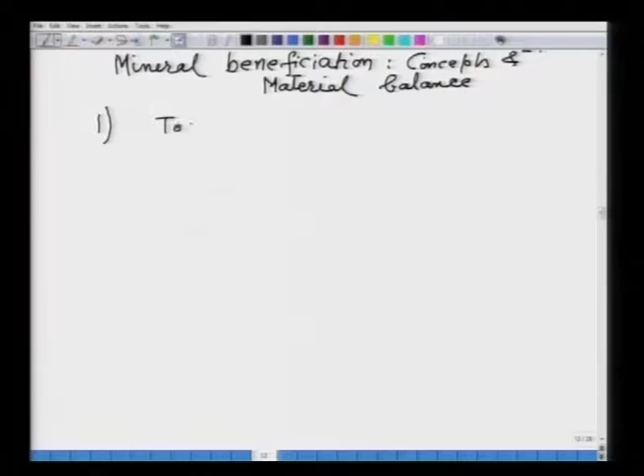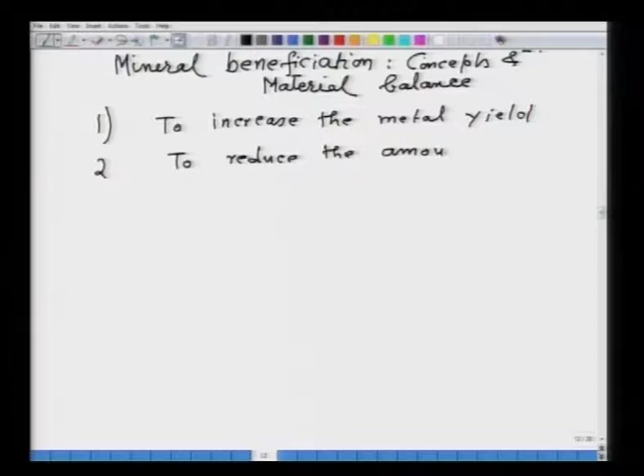Why? Because of two benefits. If you increase the metal grade of the ore, first, to increase the metal yield, and the associated second advantage is to reduce the amount of gangue.

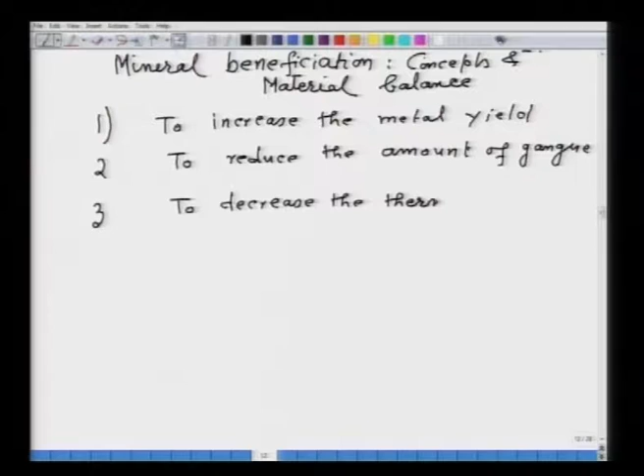Third advantage by increasing the metal grade of the ore is to decrease the thermal energy requirement, in order to separate metal from gangue in pyrometallurgical technique, because pyro means temperature, so the separation of metal from gangue occurs at high temperature.

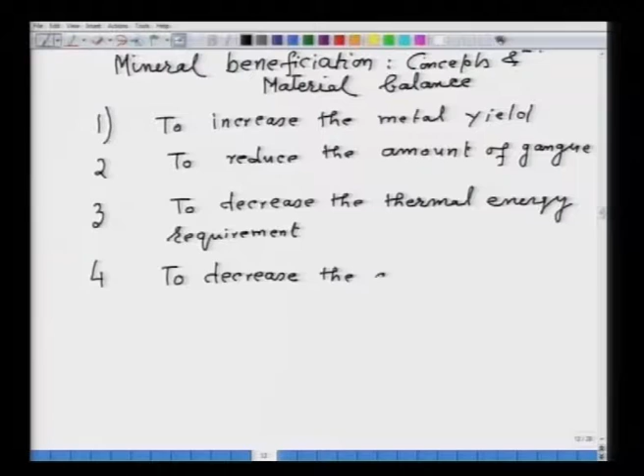So the third benefit is to decrease the thermal energy requirement, and the fourth benefit is that another route of metal extraction, hydrometallurgy, requires a large amount of aqueous solution. So by increasing the metal grade of the ore, you will be able to decrease the aqueous solution requirement in the hydromet route. So these are some of the benefits of increasing the metal grade of the ore.

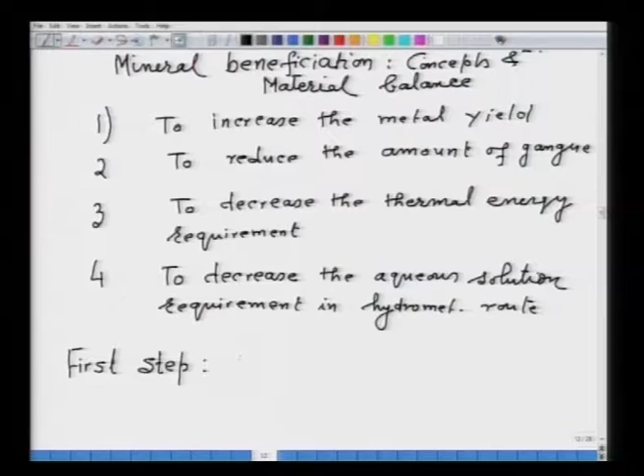Now the question comes, how to increase the metal grade of the ore? So the first step, whether it is pyrometallurgical extraction or hydrometallurgical extraction, is called mineral beneficiation. The objective of this step is to increase the metal grade of the ore. That we are very clear - we have to increase the metal grade of the ore.

Now this mineral processing technique requires two things. One is the liberation of the mineral, and second is the concentration of the mineral. So two steps are required in mineral processing: one is called liberation of mineral.

By liberation of mineral, I mean if you take an ore from the natural reserve and try to observe it under the microscope, you will find the valuable mineral is distributed within the grain, across the grain, in a very, very small amount. So if you want to increase the metal grade of the ore, you have to liberate the mineral from that matrix of gangue. How can you do that? How can you liberate the mineral?

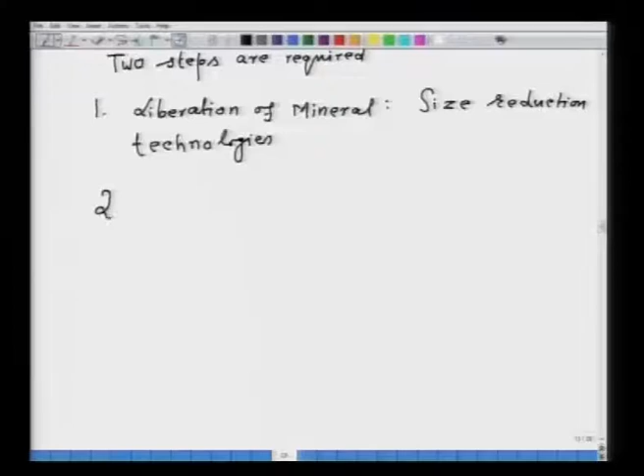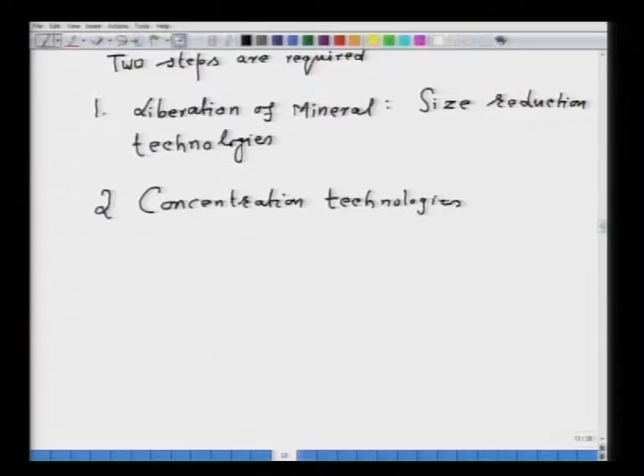What are we talking of? To create a state from the lumpy ore in hand to a state where we can obtain separation of valuable mineral. We are talking of purely physical separation, and that can only be achieved once you reduce the size of that particular lump of ore, so that the valuable mineral is set free, and later on, the so-called concentration technologies can be used to separate valuable mineral from the ore matrix.

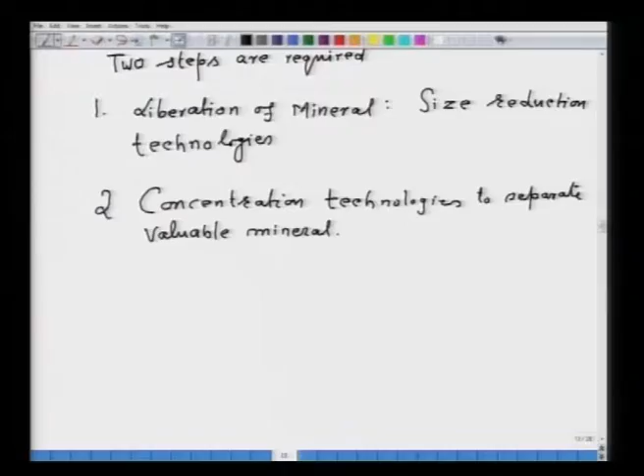So what will I do now? I will take both these steps in brief, because the objective of the course is not to go into detail of these processes. Towards the end, I will give you references where you can read further if interested in detail. Here I am going to give you those details required to develop the material balance in case of mineral processing, because that is the objective of the course - so that while applying the concept of liberation or concentration technologies to solve problems on material balance, that is the objective. So I am going to give you the brief details of both these technologies.

So let me take first of all the liberation.

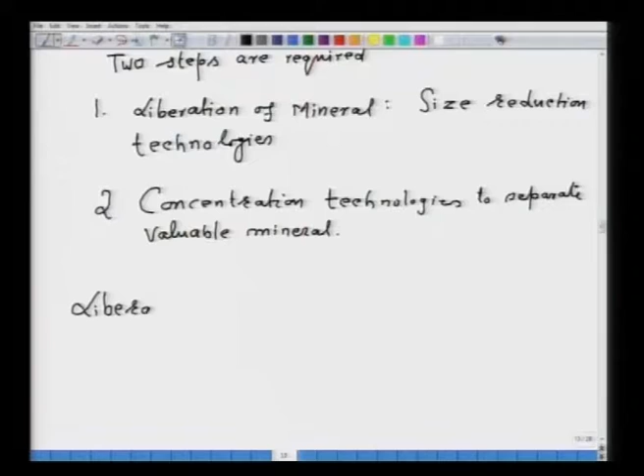We are talking of liberation of valuable mineral. That is what our objective is. Now, this is achieved. One, crushing is the first stage.

What you do? You take the lump ore from the natural reserves. Because of its huge size, it is being crushed to some intermediate size. So, the first step is crushing, and crushing is followed by screening, so that you can remove the oversize

from the undersize. Undersize means the product which is acceptable for further size reduction technologies. So, crushing is followed by screening, and in the screening you have oversize and you have undersize.

One which is passing through a screen, you call it undersize, and one which retains on the screen, you call it oversize. The oversize can be sent back into the crusher, whereas the undersize is sent back to further size reduction operation.

Now, you may argue, sir, while in the crushing we may have attained the mineral in its fully liberated state. No, it is not possible because of the size. So, then it is ground further. So, the next stage in case of liberation is called grinding.

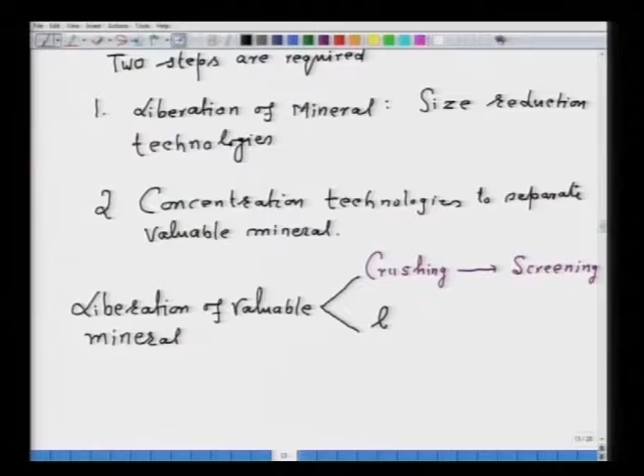Or sometimes this is also called milling operation, and in the milling operation, the feed for milling operation is the undersize from crushing operation. From crushing, that is the feed for the so called milling.

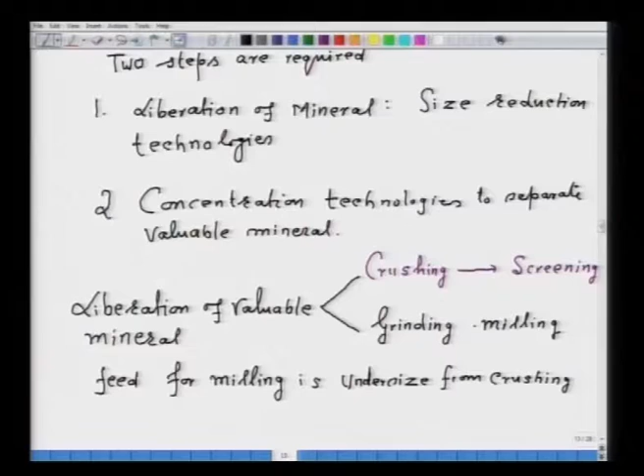Now, let us see how the milling is attained. Milling in fact is a size reduction technology where the feed is ground to a state of full liberation of particles. So, this milling is in fact what is being done.

The feed is taken into a cylindrical type of vessel which rotates at a particular speed, and the size reduction of the feed occurs by the medium. So, in fact, in milling, in short, force for size reduction is applied through a medium.

Now, medium could be balls of different sizes, they are spherical balls of different sizes, then there could be rods. So, these are the medium, they are used to grind the feed from the crusher so as to get the valuable mineral for further concentrating operation. So, according to the vessel which is being used for milling purpose, the milling is named according to this.

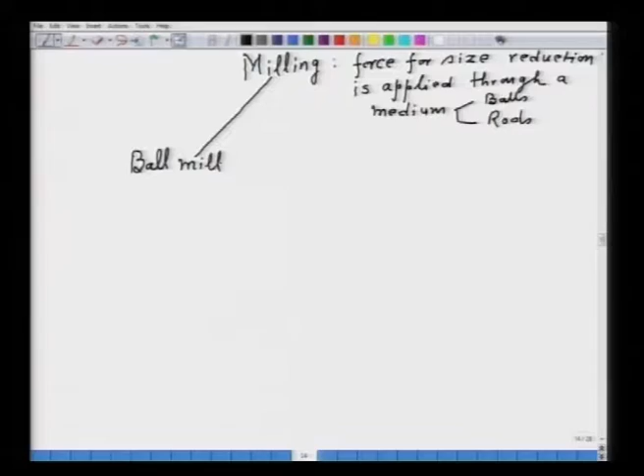So, one is called ball mill. In the ball mill, the feed is rotated in a cylindrical vessel at a particular speed, and the medium of grinding are spherical balls. That is why this is called a ball mill.

Now, here speed of the mill is important. You cannot run the vessel too high a speed or too low a speed, the details you see in any book. So, one is the ball mill, because spherical balls are used as a medium for grinding.

Another is called rod mill. In the rod mill, instead of spherical balls, straight rods are being used to mill the feed.

Now, since the objective of milling is to get the valuable mineral in its liberated state, one has to go to a very fine size. I mean that fine size where you are sure that the mineral is completely liberated from the matrix of the ore, because in the ore valuable mineral and gangue are intimately mixed. So, you have to separate it by reducing its size. That is the objective of this ball milling or rod milling.

So, because too much amount of fines is produced, and because of, what should I say, a lot of pollution and so on, milling, particularly ball milling, is done under wet condition.

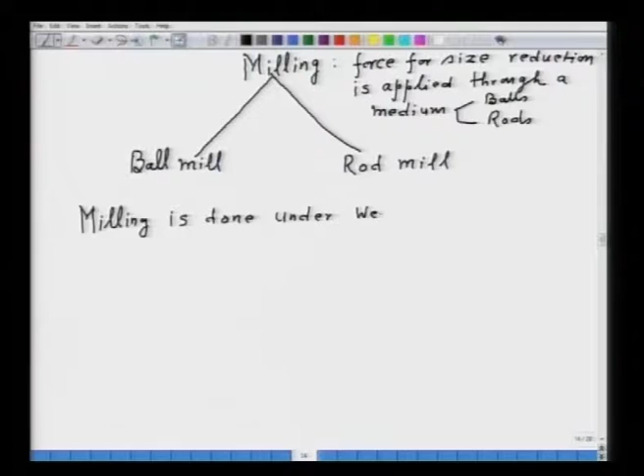However, it depends upon the size up to which you want to grind the product, but mostly milling is done under wet condition. The objective is to reduce the amount of pollution. This is also called wet milling. One is dry milling, another is wet milling. In the dry milling, no water is used. In the wet milling, water is used.

So, for wet milling, material balance is important. Why is it important? First of all, to know what is the amount of water in a milling circuit.

I will tell you what is a circuit. In a milling circuit, and second is percent solid in slurry, percent solids in slurry. A slurry is a mixture of solid and water, as I have discussed when I was lecturing on stoichiometry. Now, both this information, why do you want it?

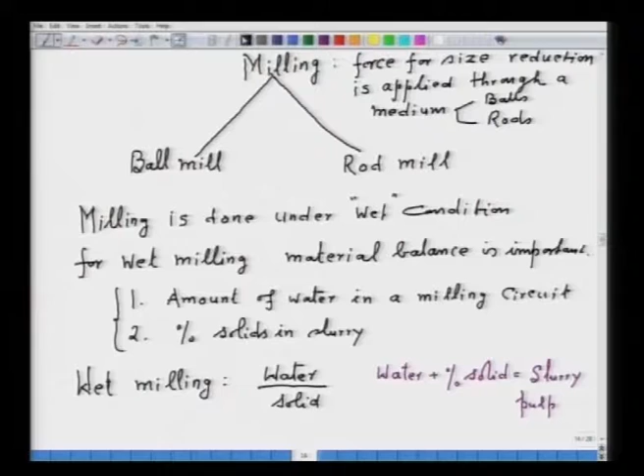Here what is important is that the viscosity of slurry is important. Why is it important? For that you have to think what determines viscosity. Viscosity determines the flowability of the mixture that you have formed. In the grinding operation, since the mill is rotating at a particular speed, the slurry should also easily move into the vessel. For that viscosity is important, and for that percent solid in the slurry is an important issue.

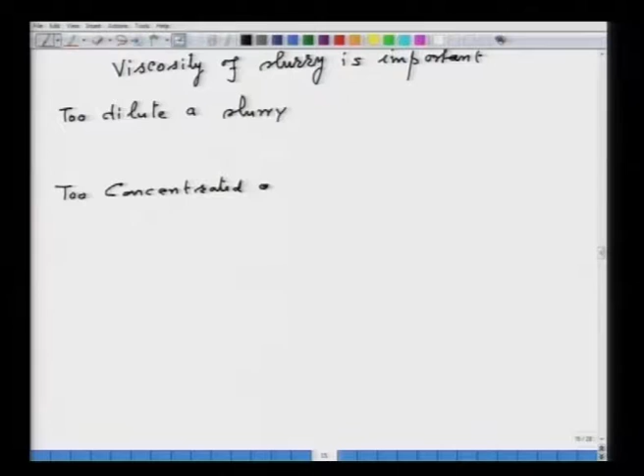Now two things can occur: too dilute a slurry, or too concentrated a slurry. If you have too dilute a slurry, the percent solid is very less, the amount of solid is less, even though you put the medium according to your calculation. Because solid is less, the medium will interact with each other. So too dilute a slurry will cause wear of the medium, which is very important.

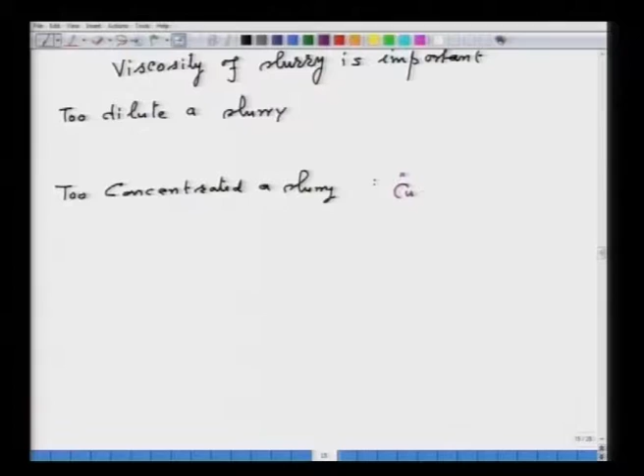If you have too concentrated a slurry, that means your percentage of solid is very high. You thought, well, let me mix more percent solid, without knowing what is the percent solid in your slurry, and you have made too concentrated a slurry. What will it do? The slurry has to move, but its viscosity has become very high, so it will be very difficult to move. In that case, too concentrated slurry will cause a so-called cushioning effect, whereas too diluted slurry will lead to wear of the medium, which is spherical balls in case of ball mill.

So these are the hazards of not having an optimum percent solid in the slurry, and for that it is important to calculate the percentage of solid in a slurry in order to arrive at an optimum composition of the slurry, or the optimum density of the slurry.

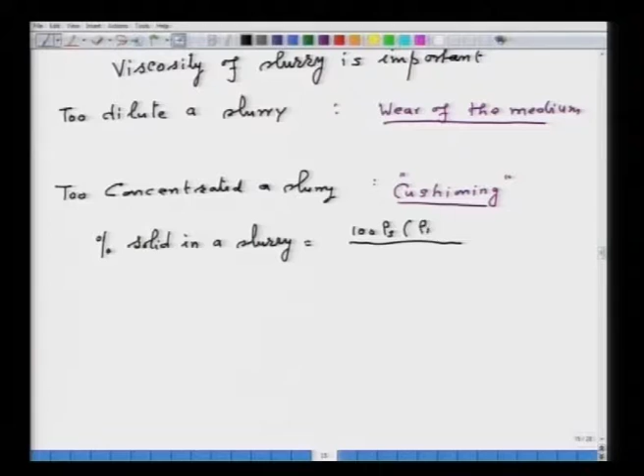Now, as you recall from my stoichiometry lecture, I gave you the formula. I will write it again: percent solid in a slurry equals 100 times rho s into rho m minus 1000, divided by rho m into rho s minus 1000. This is all density, where rho s is the density of solid, rho m is the density of slurry, and 1000 is coming because you have mixed solid in water, and water has a density of 1000 kilogram per meter cube.

So just as an illustration, if I take for example a solid which has density rho s equal to 3000 kilogram per meter cube—we have to substitute the value all in kilogram per meter cube, because I used the density of water in kilogram per meter cube—and let us take the density of slurry as 1500 kilogram per meter cube.

Then I can find out by putting both these values into the formula for percent solids. I can know now the percent solids in a slurry, that will be equal to, you can just calculate it, 50%. You can substitute those values, it is very simple, just substitute the values and you will get the answer.

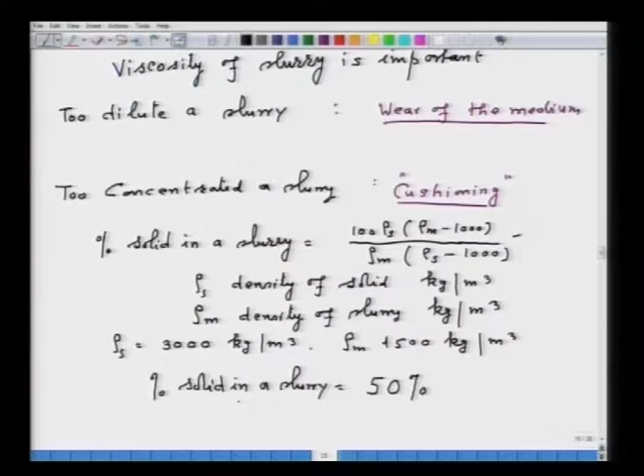Now, what will I do with the percent solid? I can use the percent solid to find out the mass flow rate of the slurry. So, ultimately mass flow rate of the slurry, that will be volumetric flow rate of the slurry into density of the slurry into percent solid, divided by

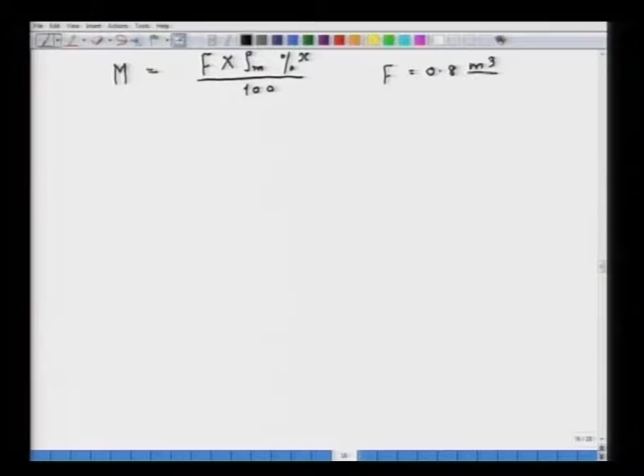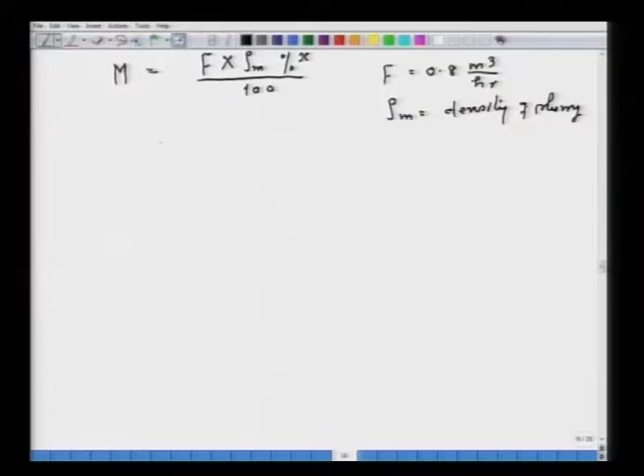100. And now, if I take F, which is the volumetric flow rate of the slurry, as 0.8 meter cube per hour, and rho m is the density of slurry, so if I substitute, I get m equal to 600 kg per hour, that is the mass flow rate of solid in the slurry. So these are the important calculations that can be performed while performing a material balance.

Now, as I have said, these flow in a circuit. Now, what is a circuit? Suppose if I want to make a milling circuit, let me make a milling circuit.

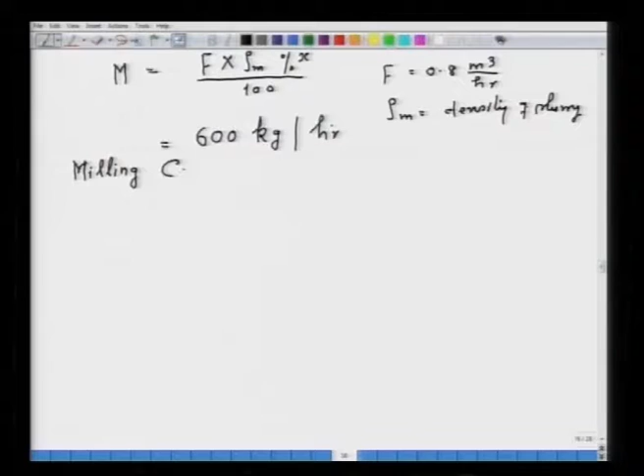Very often in the milling circuit, the feed is fed into the rod mill, then it goes for the separation, then you have undersize, oversize, connected with the ball mill. So a milling circuit, if it comprises of rod mill, hydrocyclone, and ball mill.

This will look like, for example, if I take a feed, and the feed enters into the rod mill. Here I add a little amount of water in order to make a slurry, grinding occurs, then the feed flows into the hydrocyclone.

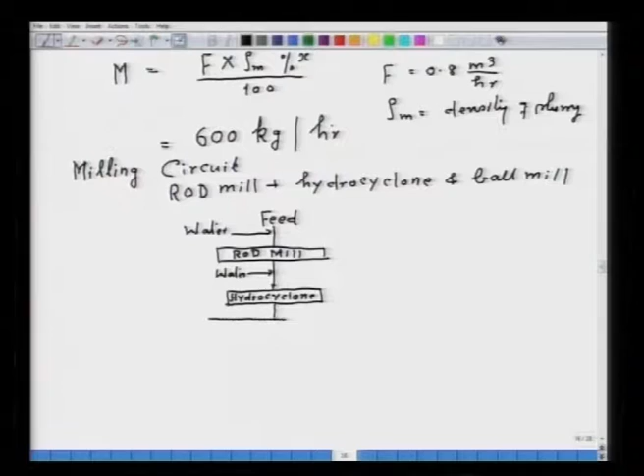Here I may add also water if it is required. So this hydrocyclone divides the feed into two products. One is the undersize and another is the oversize. Now normally in the hydrocyclone, the oversize, it is a useful product, and this oversize is sent for

concentration operations. This means that in the oversize we have attained the mineral in the liberated state, and that can go for further concentrating operation, whereas the undersize has a size bigger than required. So what is done? This undersize is fed into a ball mill,

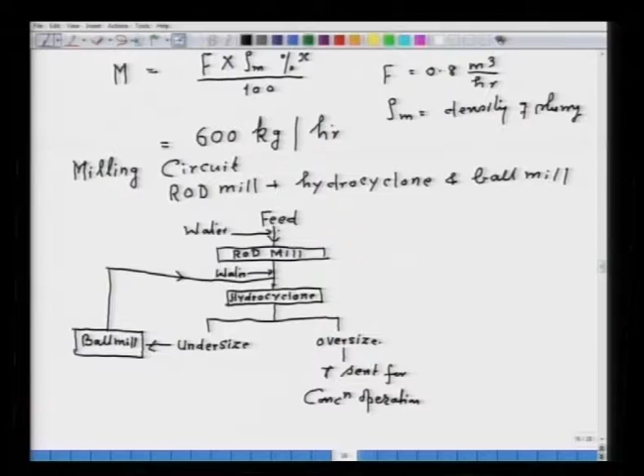and the product of the ball mill, it can go further to the hydrocyclone. That is the direction. So this entire thing is called a circuit of milling. You are required to analyze this circuit, that means you are required to know what is the amount of water that is flowing, what is the amount of solid that is flowing, and so on.

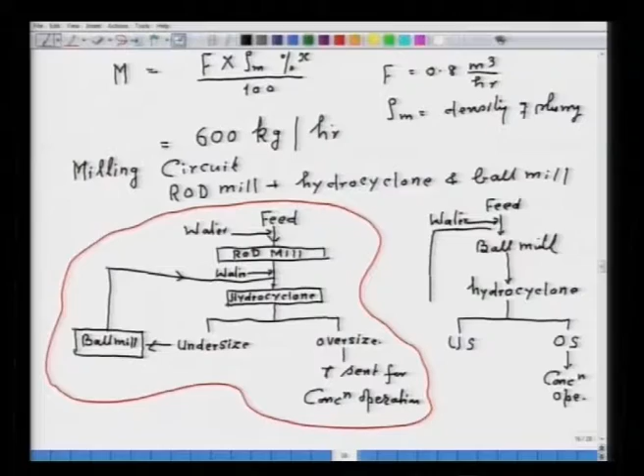Or another circuit which consists of only ball mill: you have the feed, one can directly go into the ball mill. Here water is added, then it goes to hydrocyclone, and as such the hydrocyclone, you have undersize and you have oversize. So oversize is for concentration operation, and undersize can further go for further milling operation. This is called the so-called circuit or milling circuit.

Now, in this connection I have to say something more. For example, in case of wet milling, you may ask why wet milling is done; there are advantages of wet milling. One advantage is less power requirement. Then reduced pollution, because now the fines will not be flying out of the vessel because of water.

So now this analysis of the circuit is important, and that we will do in the material balance.

Now, for further reading, if you want to go further, I give you a few references, so first you can go through the book of A. Taggart, they are the reference you should consult: Taggart, Elements of Ore Dressing, Wiley, New York, 1951. Or you can also do another, which is Newton, Extractive Metallurgy, John Wiley, New York, 1959. However, there are several books on ore dressing; you can consult any book for updating these particular things or for knowing more about the technological details of the milling operation.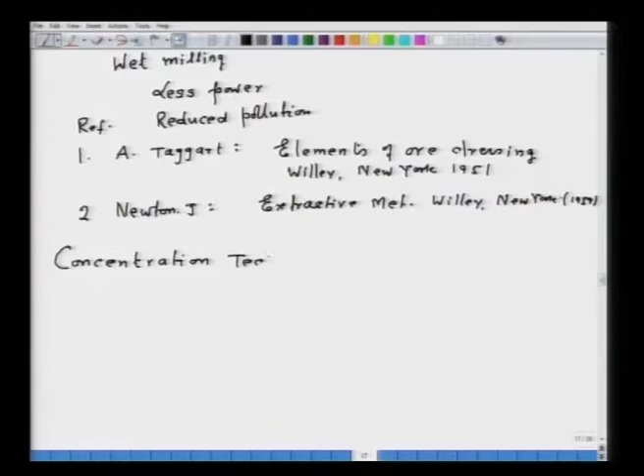Now, as the objective is very clear, what do we want here? We want to separate the valuable mineral from the gangue mineral, that is our objective.

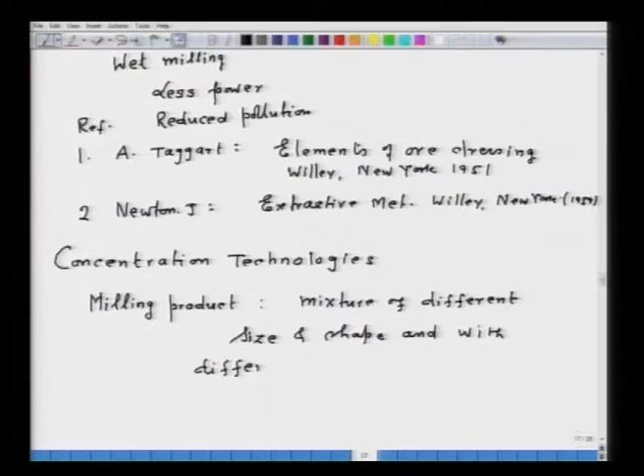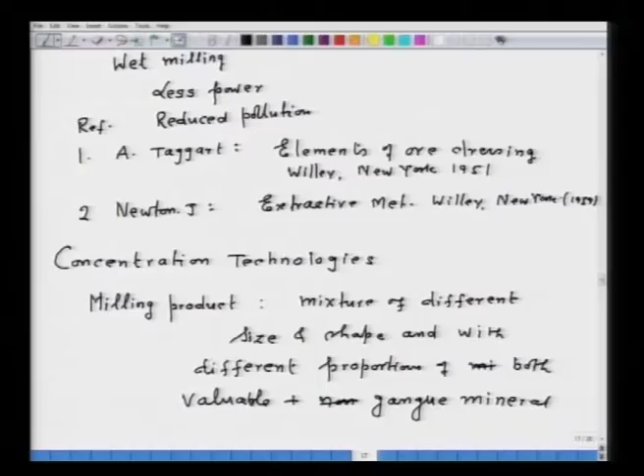So what do we have? We have now a milling product, we have the oversize of the milling product. What is this milling product? It is a mixture of different size, shape, and with different proportions of minerals, of both valuable plus non-valuable mineral, or let us call it gangue mineral. Now we have gotten this mixture, a mixture of different size or different shape. That means there are particles with different size, different shape, and different proportion of both valuable and gangue mineral.

With this I mean, suppose I have a feed for the concentrating operation. I will denote this as the so-called gangue mineral, and this as the valuable mineral. So this is the valuable mineral and this is the gangue mineral. The feed will consist of something in between these two minerals. That means you may have a feed which may consist of fully liberated mineral, or you may have it partially liberated. So this portion is gangue, this portion is mineral.

So what I wanted to say is that the feed which you have gotten from the milling operation contains particles with different sizes, different shapes, and different proportions of mineral. Now, it is very important to know that in liberation technologies, you are producing particles containing minerals. That means there are particles which are fully mineral, and there are particles with different proportions of mineral.

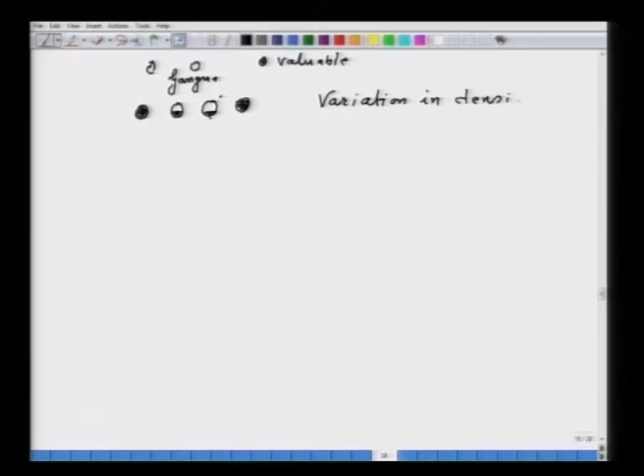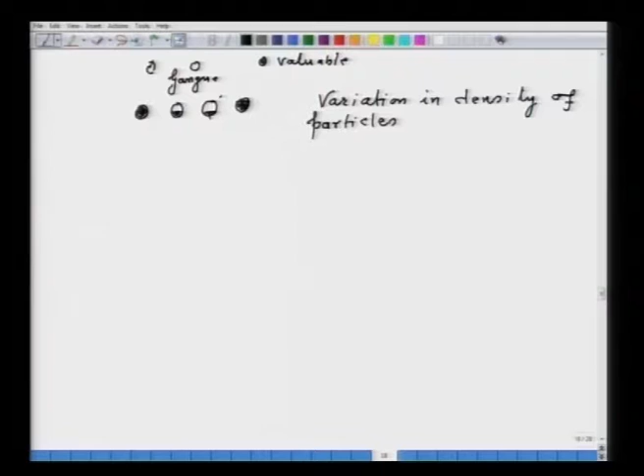So what I mean to say is that you have to develop concentration technologies to handle these particles containing mineral. Here you should also note that in this mixture we have variation in density of particles. What does this mean? It is clear that the density of a pure mineral particle is definitely greater than the density of a gangue mineral particle. Now, particles with different proportions of mineral will have different densities in between these two. So that is the key point for developing concentration technologies.

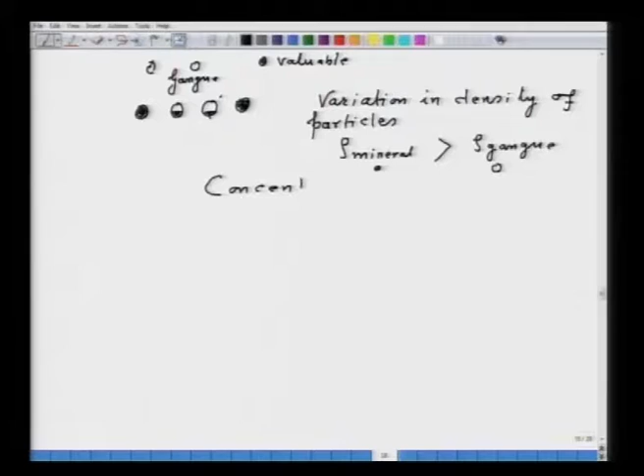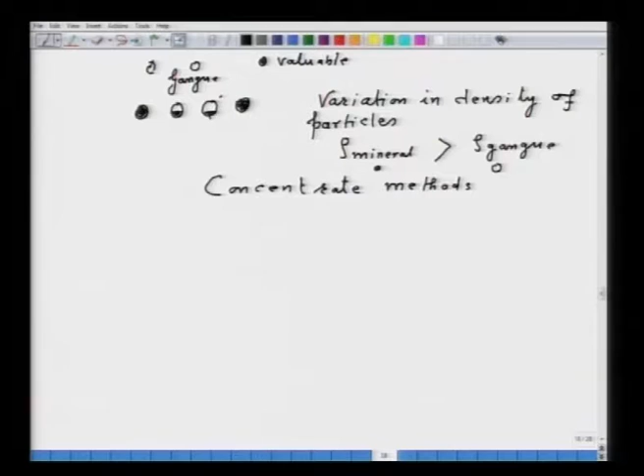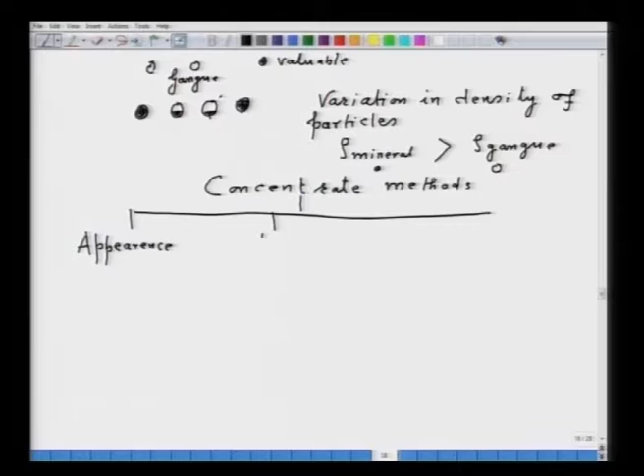So now what do we have to do? We have to separate the valuable mineral from the gangue mineral. The concentration methods, essentially most of them, are based on density. So I will list down all the methods. The first method is based on appearance - if you know the appearance of the mineral, particles can be physically sorted out. Another is based on density, where most separation is done based on density, because the density of the mineral is larger compared to the density of the gangue, and for particles in between, one can select the density of the medium so that separation could be achieved. Another very popular method is surface modification.

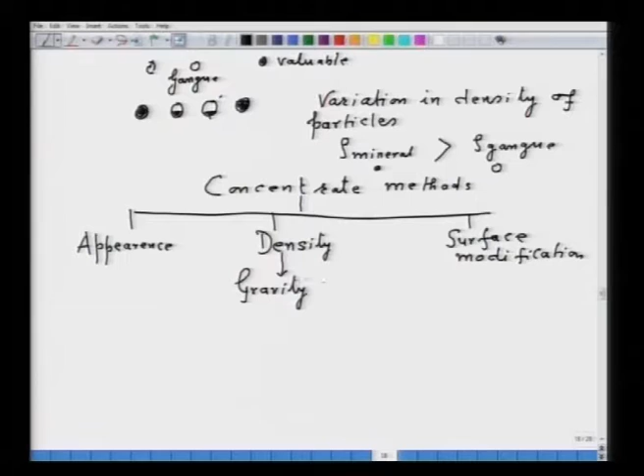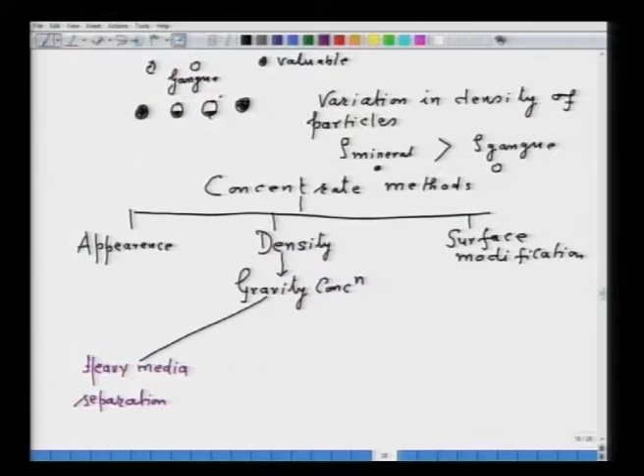Just to give you a little idea of the various methods: density-based methods are called gravity concentration methods. In gravity concentration method, we have one called heavy media separation - that is, you select a medium of some density so that the particle containing minerals can be floated or sunk depending on the density of the medium.

Another method is called classifier, where air can be used as a medium or water can be used as a medium, and the velocity of fall of particle is used for separation, which is different in air and different in water. Accordingly you have pneumatic classifier or hydro classifier. In hydro classifier you use water as a medium, in pneumatic classifier air is used as a medium, and the difference in density is the key concept for achieving separation of the mineral.

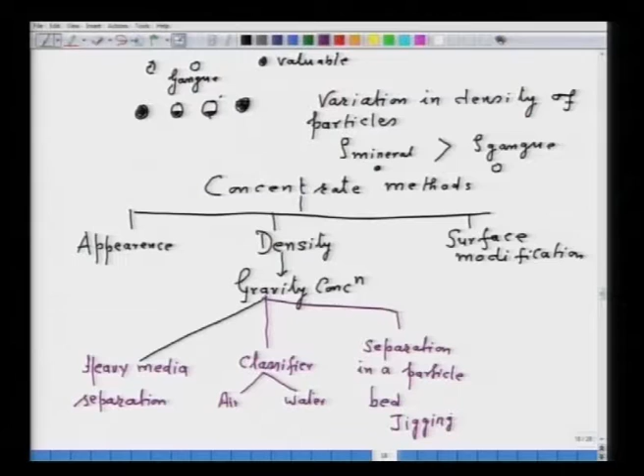The third technology is separation in a particle bed, and the most important technology here is jigging. The last one is thin film flowing, which is called tabling.

Now, surface modification means you modify the surface of the mineral. You are not chemically affecting the mineral, you are modifying its surface so that it becomes hydrophobic or hydrophilic. This method is called flotation.

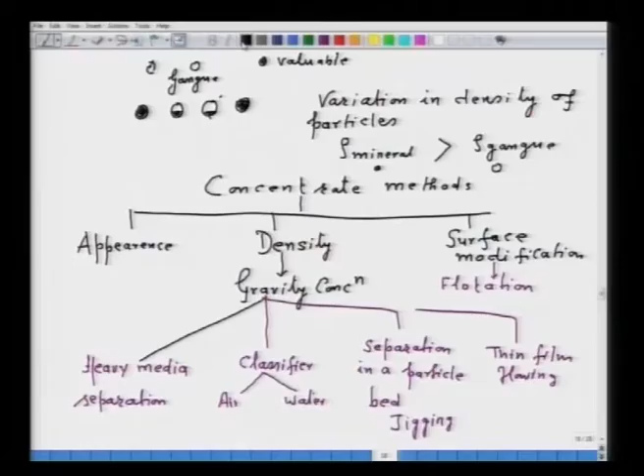This method is called flotation. The principle is the density difference between the particle containing minerals and the medium which is being used. The objective of all these concentrating technologies is to separate the feed.

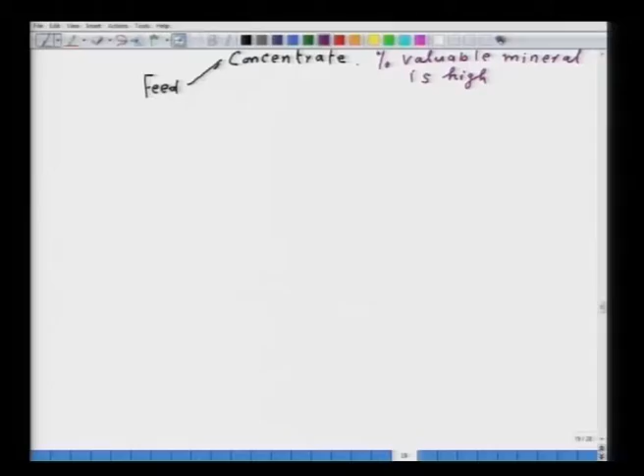You separate the feed into three products. One is the concentrate, and in the concentrate the percent valuable mineral is supposed to be high. That is why you call it concentrate, and this concentrate goes to the plant for extraction of the metal. This concentrate is of high grade and it can be used for further processing to get the metal.

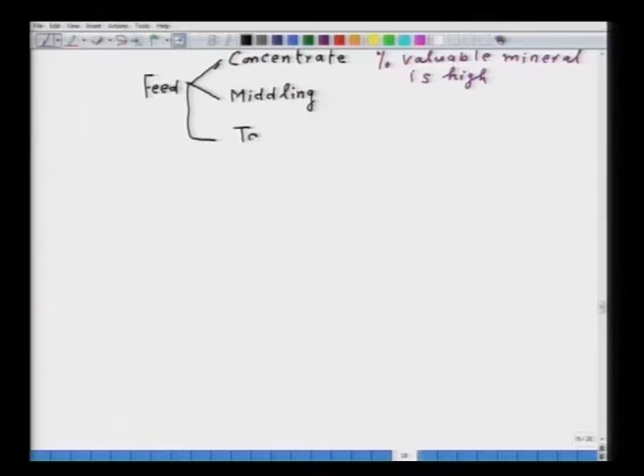Another product from the feed is called middling, and the third product is tailing. Tailing is purely waste; it contains most of the gangue minerals. Middling may contain both concentrate and tailing. So what is done is the middling is further treated, so that some portion goes to concentrate and another portion goes to tailing.

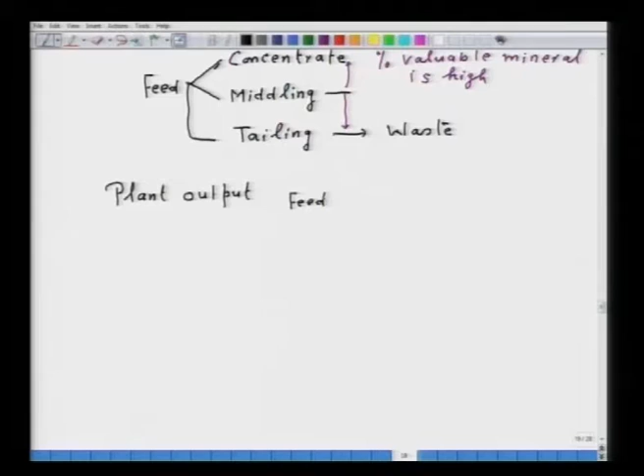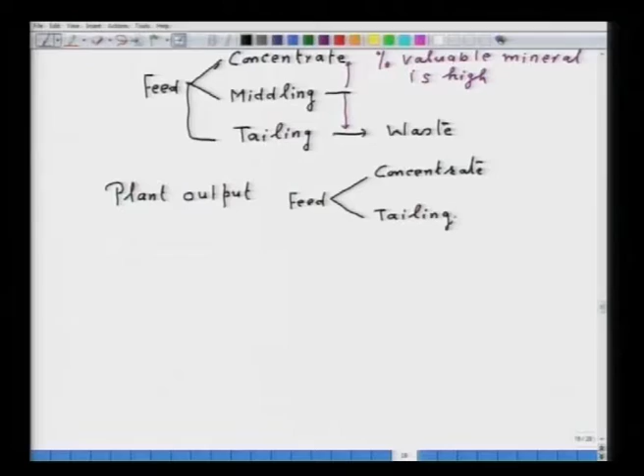So normally the output of a plant consists of feed being separated into concentrate and tailing. This is the output of a plant: feed is separated either as concentrate or as tailing.

This concentrate is dried, or kept in wet condition, and sent for metal extraction, while tailing is waste and it is dumped or sent for waste treatment, or whatever you want to do with it.

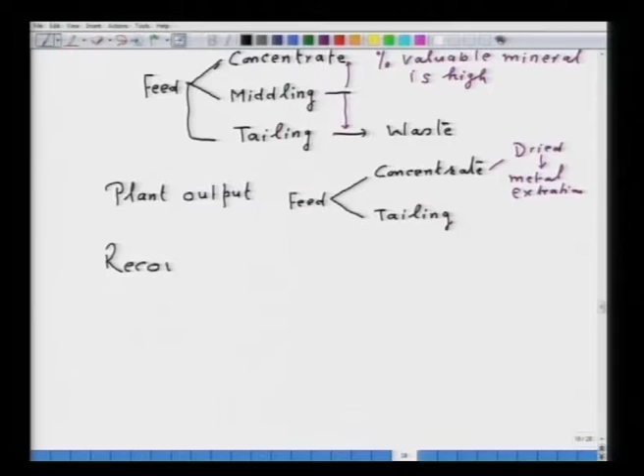Now, one of the most important things you should know is recovery and grade. Recovery of particles containing valuable minerals, or recovery of a valuable mineral, can be 100%, but the metal grade will not be 100%; it will belong to the metal grade of a pure mineral. Let me illustrate by an example.

If I take an example where I take a feed of say 1000 kg, and in that 1000 kg I have 500 kg chalcopyrite, 200 kg Fe2O3, plus 200 kg let us take SiO2, and 100 kg let us take Al2O3.

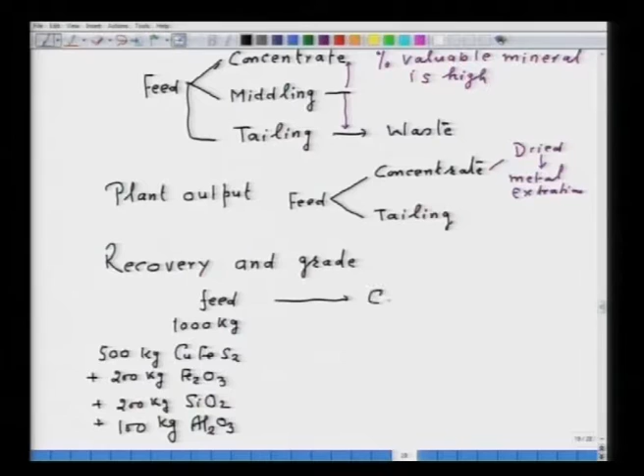Now I have got the feed, say concentrate. I produce a concentrate now, which also has 1000 kg, in which 500 kg CuFeS2, plus 200 kg Fe2O3, plus 200 kg SiO2, plus 100 kg Al2O3.

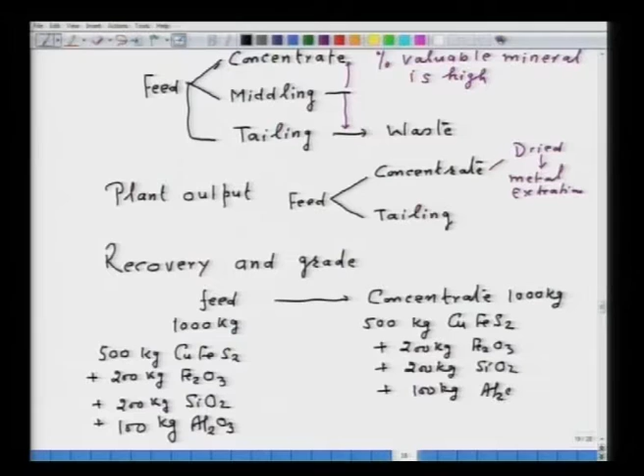What have I done? I have done nothing. I have taken a feed and said it is a concentrate and claimed I have recovered 100%. No doubt the valuable mineral in the feed was chalcopyrite, CuFeS2, so you have recovered all the valuable mineral in the concentrate. But now what is the grade of this concentrate? The grade of the concentrate is very, very low, because the gangue minerals are as they were in the feed.

If the feed has X as the metal grade, then the concentrate also has X as the metal grade, because you have not removed the gangue minerals at all. So therefore, recovery and grade are both important.

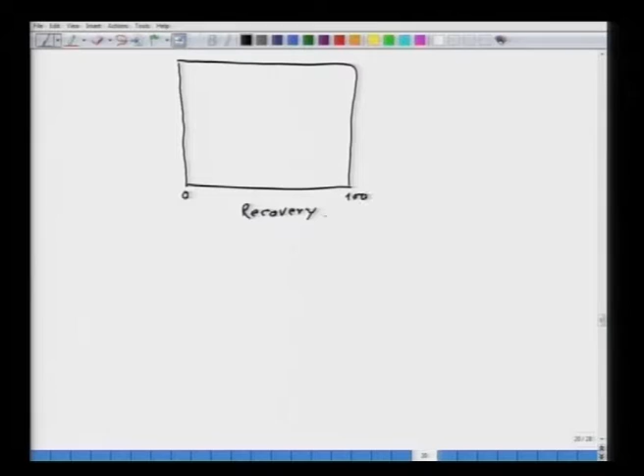Now if you want to see how they vary, the variation goes something like this. Say if I take recovery here, which could be for example 0 to 100 in percent, and I take grade here. For 0% recovery, this is the value of the grade, and this value corresponds to the grade of a pure mineral.

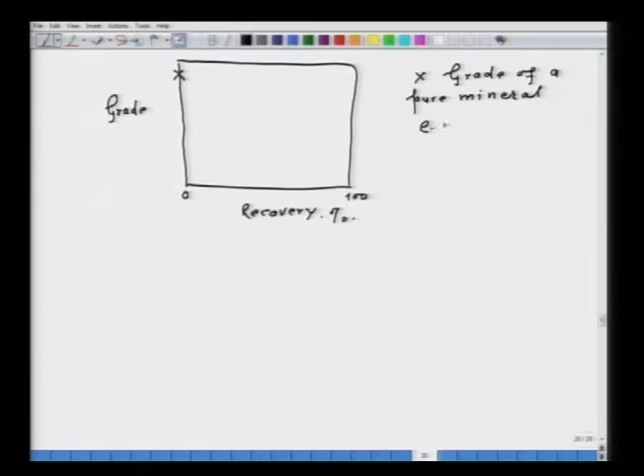Grade of a pure mineral, for example, copper grade in CuFeS2 is 34.7%. So that point is this.

Now you can't go beyond this. The metal grade cannot be more than 34.7%. So you see, the metal grade can never reach a value of 100; it will depend upon the composition of the compound and their stoichiometric values. So remember, grade can never be 100.

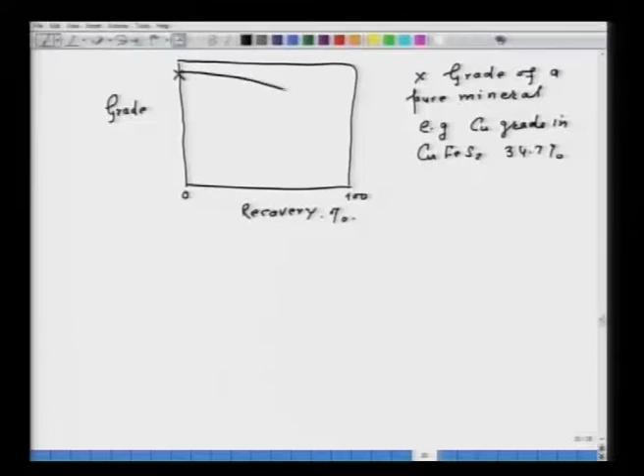So here, if I increase the recovery, what will happen? The grade will decrease, and ultimately at 100% recovery, this will be my grade. So that is how the relation between grade and recovery works. A recovery of 100% means I do nothing, that is, I divert the entire feed to the concentrate, but then the grade is very important because we want to produce metal from the concentrate.

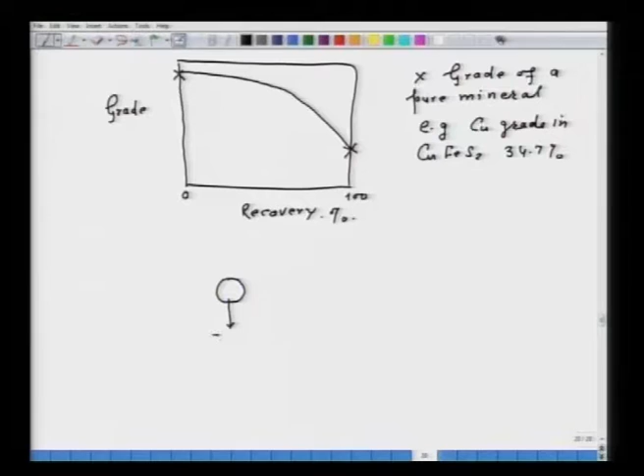Number two important thing is that for all gravity concentration operations, it is the velocity of the particle that is very, very important. If I consider a particle which is falling, it experiences three forces: this is due to weight, Fw, and this is a sort of buoyancy force.

See, buoyancy force, and this is a so called drag force. This you must have experienced if you take a particle and dip in water, because of its weight it sinks, and if the upward forces equalize the downward forces, then it is stable, otherwise it will move. So, if you do the force balance, then we say that Fb plus Fd, that is equal to Fw.

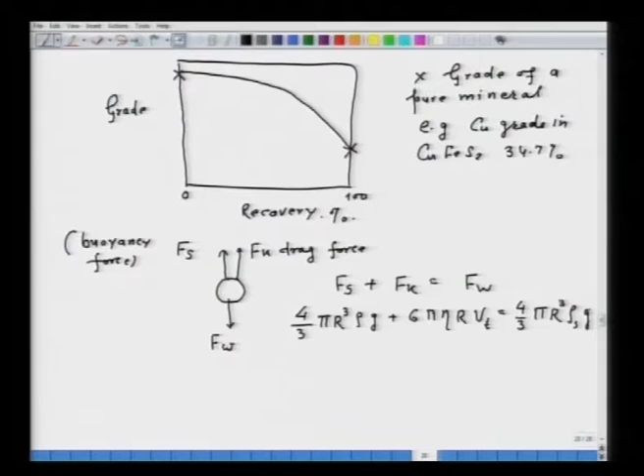If I substitute the value, considering a spherical particle, then 4 by 3 pi r cube rho into g, plus the drag force, this is the viscosity term, Vt, I will tell you what is Vt, that will be equal to 4 by 3 pi r cube into density of the solid into g. So, if I solve this, then I will get Vt, that is equal to d square, rho solid minus rho, into g, upon 18 mu. So, Vt is called terminal velocity.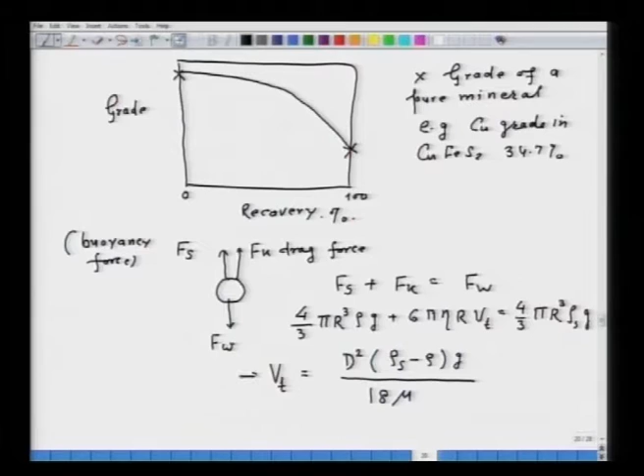Vt is called terminal velocity, and this terminal velocity is very important in case of gravity concentration operation. However, this terminal velocity we have determined for the Reynolds number to be very, very less than 1, even less than 0.1. However, for larger Reynolds number, the turbulent forces also come into the picture, and accordingly the value of velocity is to be determined.

But what I wanted to say here is that for the gravity concentration operation, let me put this as eta, that is the viscosity. So, let me say this is the viscosity, rho s is the density of solid, and rho is the density of water. So, what I wanted to derive from here is that Vt is proportional to d square.

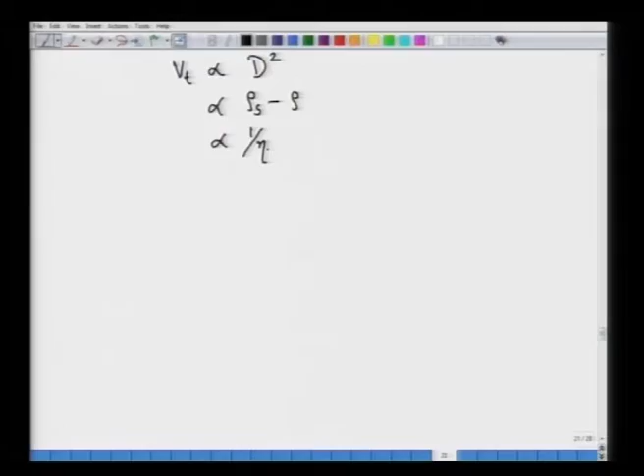See, larger is the size of the particle, higher is the terminal velocity. So, you can plot this easily. Also, it is proportional to the difference rho s minus rho. Also, it is inversely proportional to viscosity of the fluid, that is, proportional to 1 upon viscosity. So, all these three factors have to be optimized in order to produce a concentrate from the milled product.

Now, I think there are frequently some asked questions. So, let us see some of the questions. Sir, can you please explain the difference between ore and mineral?

This difference is very commonly asked, and many times students get confused. So, let me tell you very clearly that an ore is an aggregate of minerals. That means it contains valuable mineral as well as gangue mineral, whereas a mineral is an inorganic compound in which the elements are combined in stoichiometric proportions. For example, if I take iron oxide, say Fe2O3, Fe2O3 is not an ore.

It may be confusingly thought of as an ore. No, it is not an ore, it is a mineral, and in that mineral, 2 molecules of iron are combined with 3 molecules of oxygen, and you get a mineral. But when you call it an ore, then it becomes hematite. Hematite never means it has only Fe2O3, though people say it has only Fe2O3. No, it never means it has only Fe2O3, but when you say hematite, then it has Fe2O3, Al2O3, TiO2, SiO2, alkali, and so on. So, in fact, ore is an aggregate of minerals, whereas mineral is an inorganic compound.

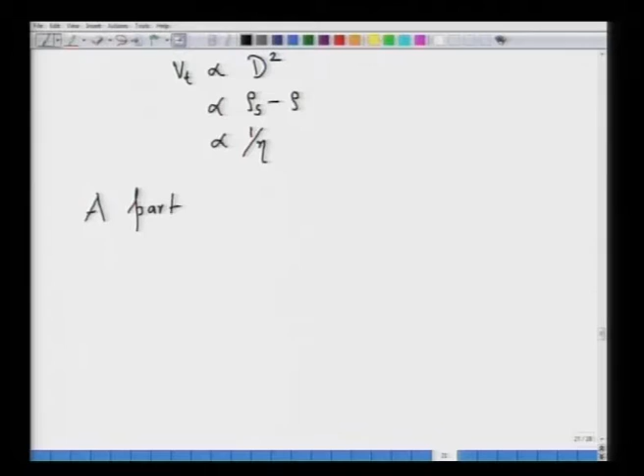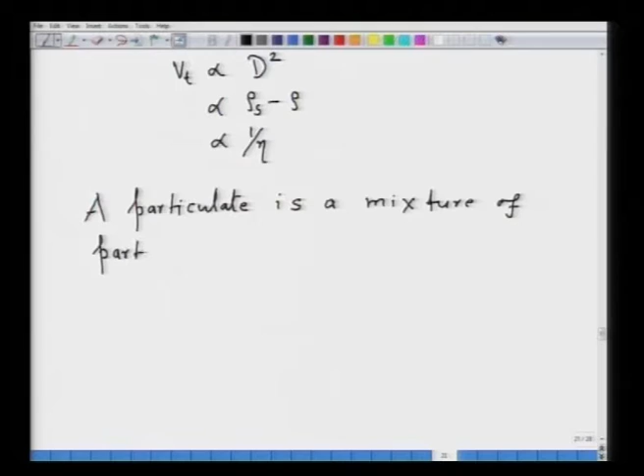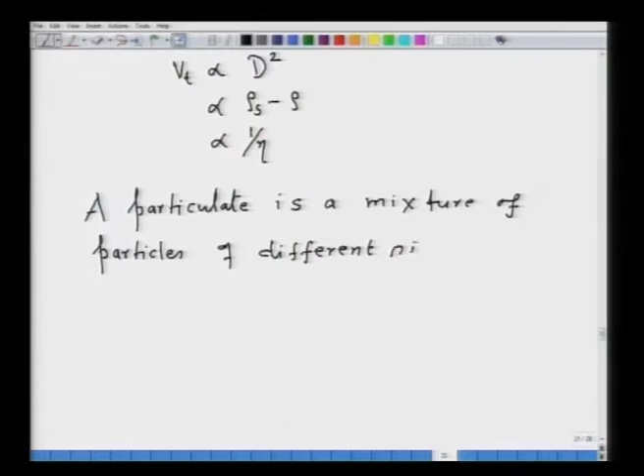So, essentially I can write down the definition: a particulate is a mixture of particles of different size, shape, and different proportion of minerals.

When you say a particulate, the milled product subjected to concentration technologies for recovering the valuable mineral, that feed you can call a particulate. That means in that particulate there are particles of different sizes, shapes, and different proportions of mineral. Remember, we never separate the mineral itself, we separate particles containing mineral. A particle may have fully liberated or partially liberated mineral. So a concentrate should not be thought of as pure mineral, it has valuable mineral as well as gangue, because you are concentrating particles containing minerals, and the particulate has different sizes with different proportions of mineral. So in the concentrate, gangue will also be present, though its percentage is very small. That is what a particulate means.

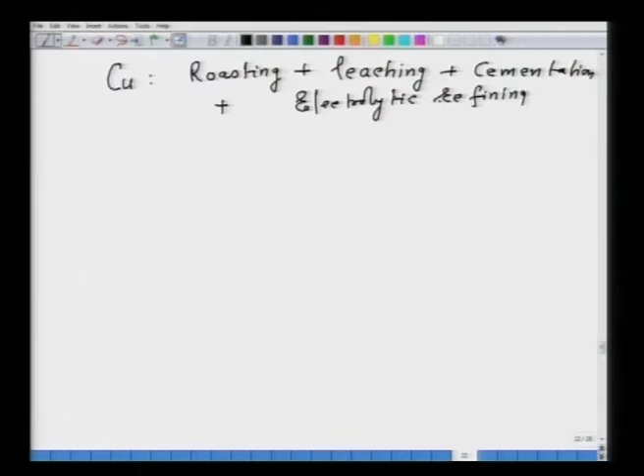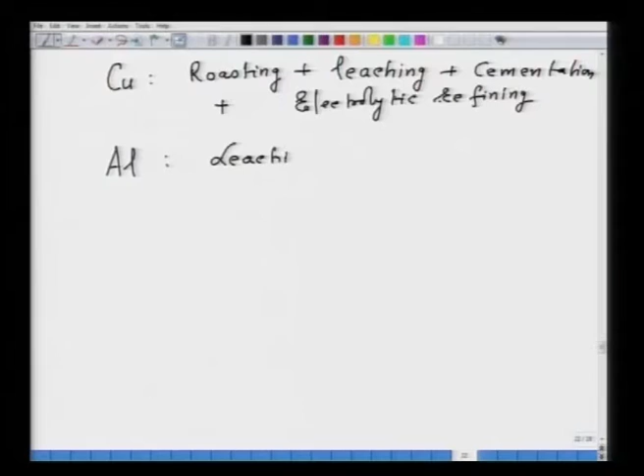For aluminum, since bauxite is an oxide ore, you have leaching plus electrolysis. Similarly, for magnesium, you again follow the route of leaching plus electrolysis.

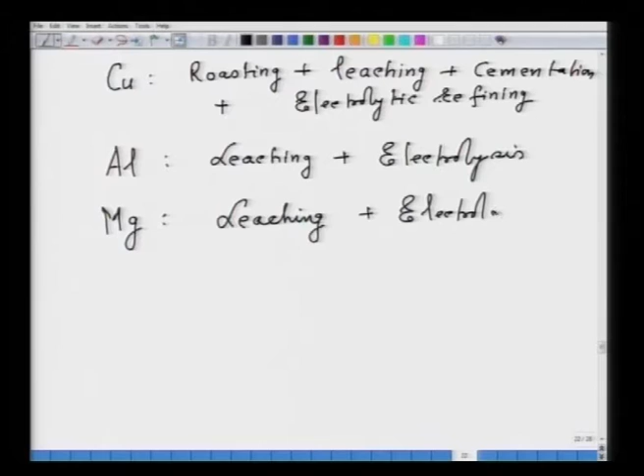So in hydrometallurgy, roasting is sometimes used to convert sulphide into oxide or sulphate, because sulphate and oxide can be leached, so the metal can be brought into solution form, and then you can adopt the separating technology. There could be several examples, for instance zinc can also be done by hydrometallurgy, nickel by hydrometallurgy, again roasting, leaching, and these are the separating technologies.

Is there any difference between slurry and pulp? In all mineral processing operations, these terminologies are used interchangeably. Slurry and pulp convey the same meaning: you take solid and dissolve it in water, you can call it slurry or pulp. I think pulp is coming from the sugar industry, I'm not sure, but both are used interchangeably and both refer to a mixture of solid and water in mineral processing.

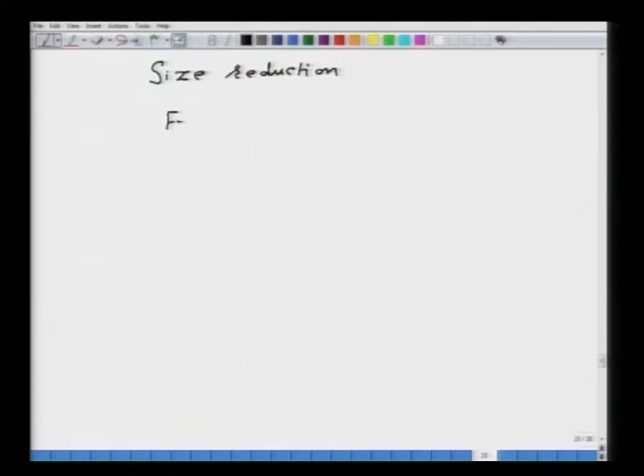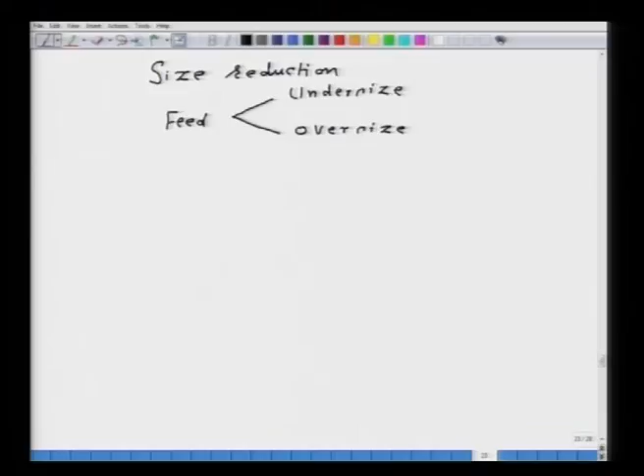Please explain once again the separation of feed into products. When you employ size reduction technology and concentration technology: in size reduction technology, the feed has undersize and oversize. The feed separates into undersize and oversize, and when you perform screening utilizing a sieve, the undersize is the one which passes and is sent for further operation, while the oversize is sent for further size reduction operation.

But when a hydrocyclone is used for separation, because of the way separation occurs, the overflow is useful and the underflow is sent for grinding operation. That is important. Recall that in the ball milling circuit, the overflow was sent for concentration and the underflow, or the oversize, was sent back for milling. But if you perform separation using a sieve, it is the other way around. So that point is important.

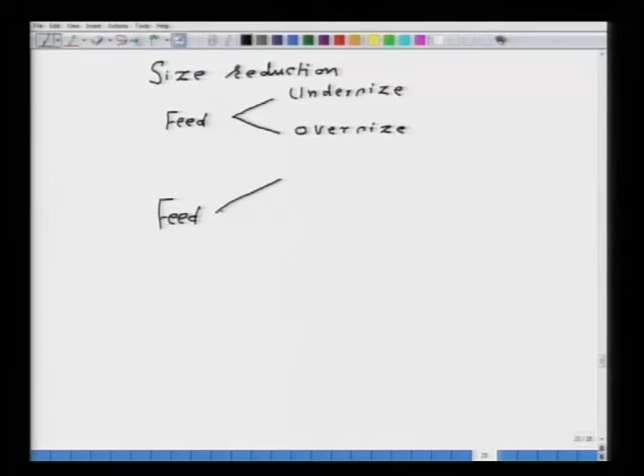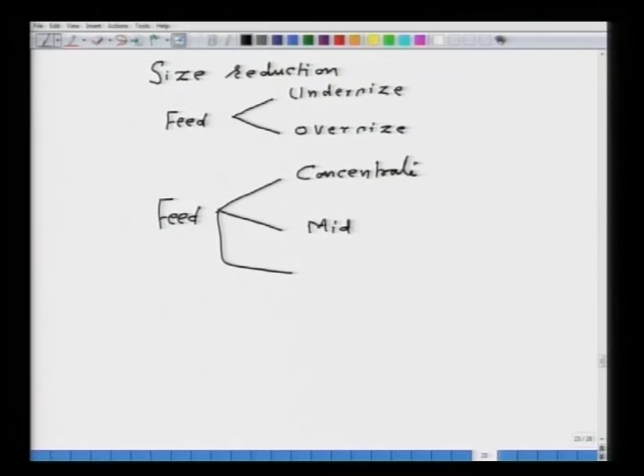Now for concentration technology, the feed normally separates into three products: concentrate, middling, and tailing. Middling can be thought of as something in between concentrate and tailing, so middling is further processed, with a portion going to concentrate and a portion going to tailing. In fact, the plant output has only concentrate and tailing. Concentrate goes for metal extraction and tailing goes to waste. Thank you, sir.